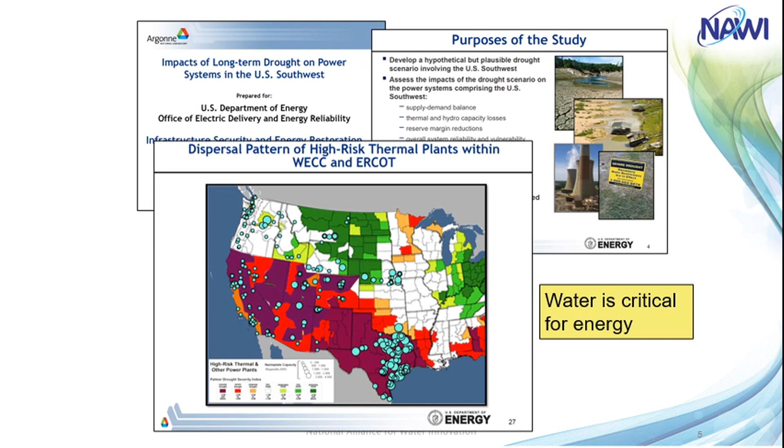But with time, the DOE began to appreciate that the water-energy nexus is much more inextricably linked. And in fact, that there are places where water and energy cross over. And in some cases, for example, in the generation of biofuels, water is an integral ingredient to producing the feedstocks that will generate biofuels of the future. Similarly, if we are going to capture carbon and store it underground, water might be the vehicle by which we pump that carbon back under the surface.

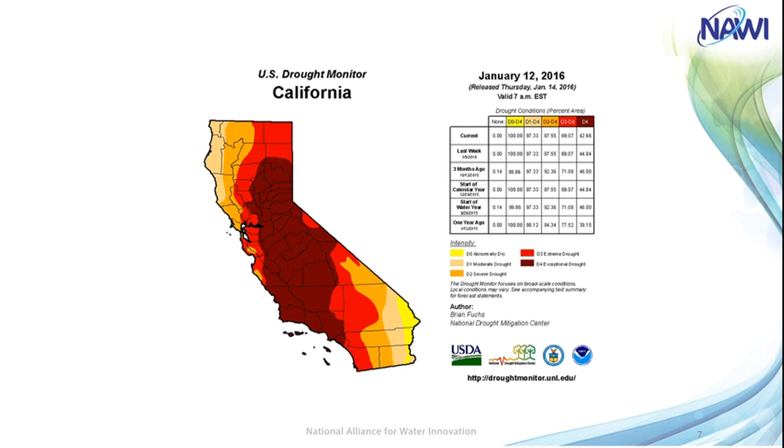Well, in California, we had our own interesting revelation, how important water and energy were. You may recall that in the last decade, California has had a series of multi-year droughts. And those droughts have prompted conservation measures. The governor at the time, Governor Jerry Brown, passed an executive order in which he insisted that state agencies and individuals undertake water conservation. And in fact, we were very successful. Citizens in California cities and towns managed to achieve a 25% reduction in water use. It was a great achievement.

Well, researchers at the University of California at Davis looked at the water savings associated with the water conservation program, that 25% water reduction that we achieved during our last drought. And they calculated how much energy was avoided because you didn't have to pump as much water, because you didn't have to treat as much water. And they found, surprisingly, that the amount of energy saved simply from that water conservation was almost equal to all the other energy conservation programs combined.

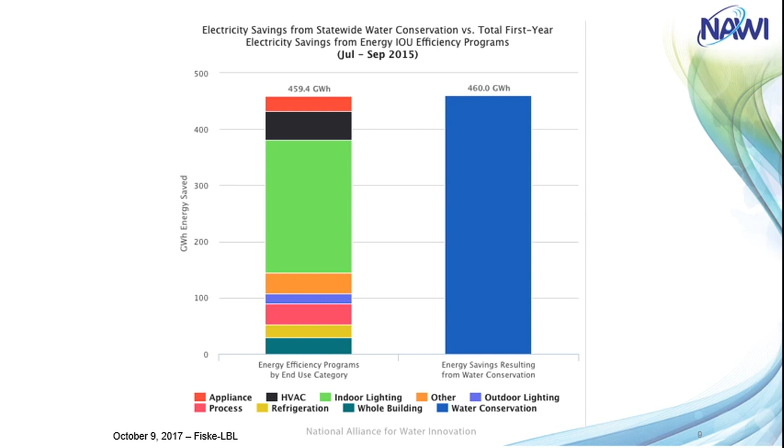And this taught us something very important. Water is energy. The two are inextricably linked, and you can't efficiently address one issue without addressing the other. So those are the reasons why the U.S. Department of Energy became so interested and motivated to study water, and in particular, desalination.

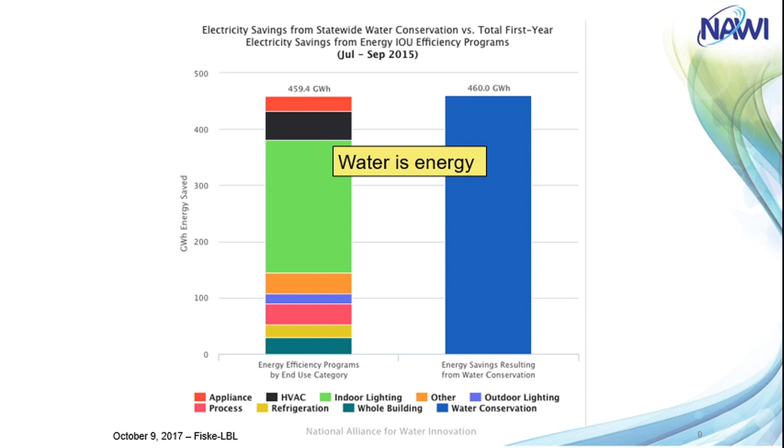So NAWI, the National Alliance for Water Innovation, is an innovation hub. This is a collection of organizations that have come together for a short period of time to conduct combined research and team science to address a key issue, desalination. The founding organizations are Lawrence Berkeley National Laboratory, where I am, Oak Ridge National Laboratory in Tennessee, and the National Renewable Energy Laboratory in Golden, Colorado. We've partnered with other agencies and organizations such as the Electric Power Research Institute and several California state agencies, including the California Department of Water Resources, the California Energy Commission, and the California State Water Resources Control Board.

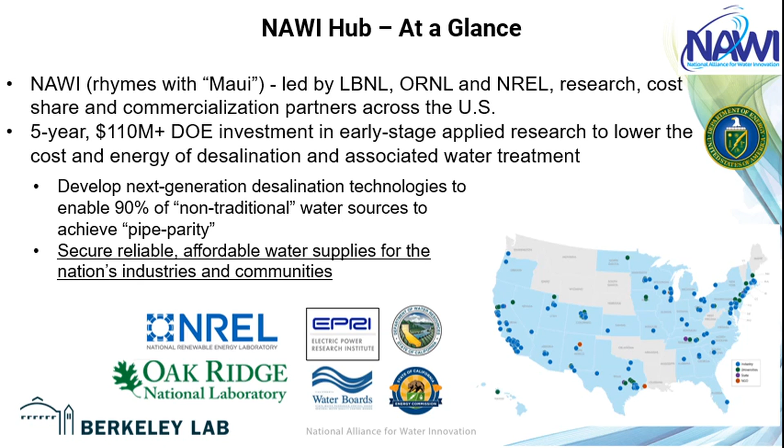Our goal is to develop the next generation of desalination technologies to enable 90% of what we call non-traditional water sources, waters that we're currently throwing away, to achieve pipe parity. That is to say, lower the cost of desalination so that the marginal cost and energy of producing fresh water or clean water from that non-traditional source is comparable to the marginal water supply presently available. Our goal is to secure reliable, affordable water supplies for the nation's industries and communities.

Now, you're probably familiar with a research consortium or a research hub. It's a group of research organizations that come together to share results and to build and do joint science. And that's part of the NAWI organizational structure. And of course, we have a wide group of US universities and industries and state agencies associated with that.

But we have around that research consortium a larger organization called the NAWI Alliance. This is an open organization. Any organization in the world can join the NAWI Alliance, and we have lists of more than 300 members so far. The NAWI Alliance can listen to and access all the research results from the NAWI Research Consortium, as well as join research teams. Universities and individual researchers are welcome. So this is one way that you can get involved in the NAWI program.

Well, before COVID, we had a range of methods by which we got together and planned our coordinated research. We had annual team meetings, and our most recent one in November 2020 was virtual, and we had industry-specific breakout meetings and even events at aligned technical conferences. And we had field trips. Many of our most successful projects are joint projects with water-producing organizations or industries, including major utilities in the United States.

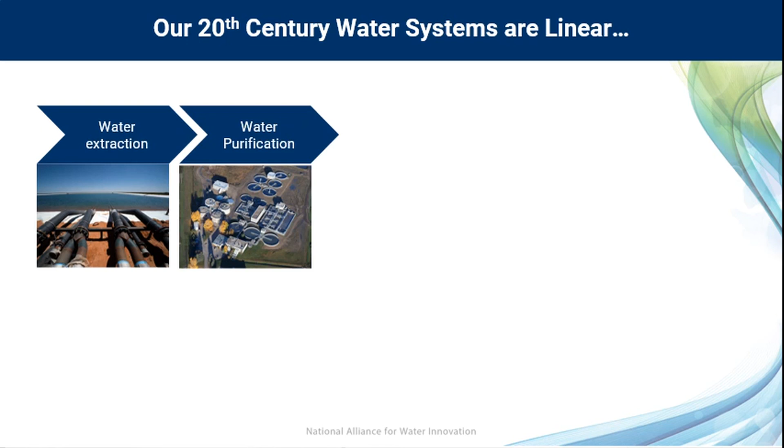At that central treatment facility, as I said, we produce a uniform, high-quality grade of water product, and then we send that finished water out into a distribution system where it's used in a wide variety of environments, including a number of environments where drinking water quality water is not really necessary. Nevertheless, this is the quality of water that we have. In the course of using all that water, we bring that water back in a second centralized network to centralized wastewater treatment systems where we treat the water to a condition in which it is safe to discharge, and we toss it back into the environment.

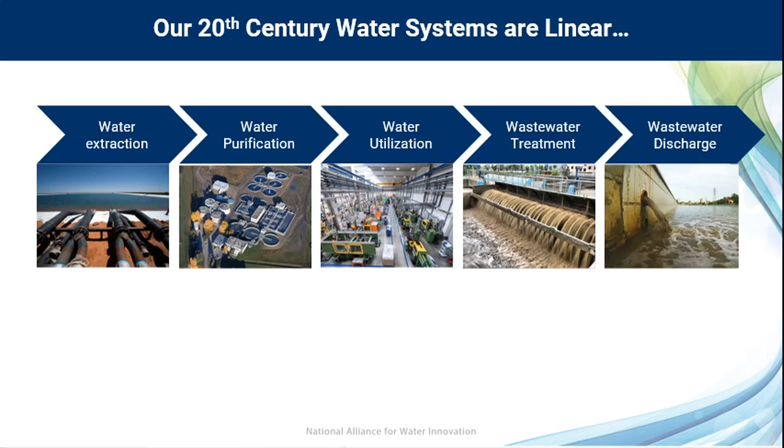Now, this linear system that we've developed is a marvel, and it has led to enormous economic growth over the last century. But it's facing some limits. For starters, climate change is imposing new limitations on the availability and predictability of our freshwater supplies. One scientist said that water is the delivery vehicle for the effects of climate change. And we certainly see this in the western United States, where we have extended periods of drought and a loss of reliable fresh water. For our communities and our cities, much of the water infrastructure below our feet is reaching the end of its life, and we are seeing an increase in cost associated with repair of our water infrastructure.

In some parts of the United States, in fact, we have small communities that are so far away from any water supply that they do not have a reliable, safe, affordable source of drinking water. And then finally, we have discharges of pollution and emerging pollutants. And these emerging pollutants are introducing risk, not just to our environment, but also an economic risk to our businesses. In fact, in many situations, our current discharges may represent future liabilities to our industries. Well, all this water is everywhere, but it's not usable.

And in fact, the first example of this vision comes back more than 60 years ago from the Kennedy administration, where John F. Kennedy proposed a bold vision to develop science and technology to enable desalination of the nation's salty waters. Now, out of that proclamation in 1962 came a small office within the U.S. Department of the Interior called the Office of Saline Water. And they began to produce research reports to understand the processes of desalination.

The fruits of that research you can see everywhere around the world today. Desalination, the most dominant technology being reverse osmosis, produces more than 10 billion gallons of clean drinking water around the world. This is an image of the Carlsbad desalination plant just north of San Diego in California, the largest desalination facility in the Western Hemisphere.

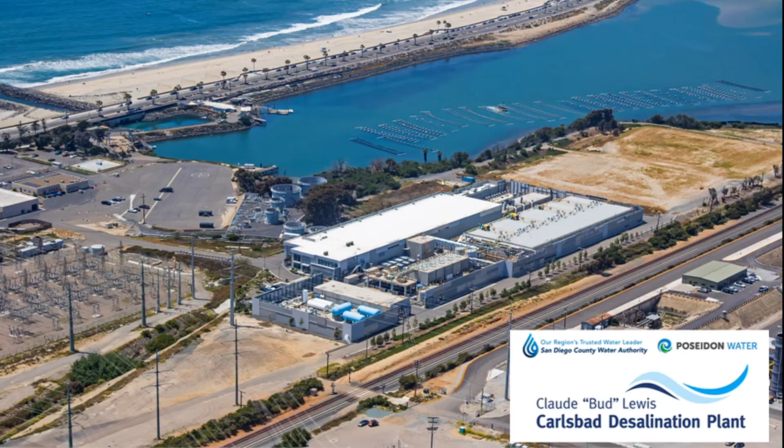But ocean water is not the only salt water that's out there. We produce a lot of salty water, for example, from our power systems. When we generate electricity, we often produce wastewater that contains salts and other minerals that needs to be treated. Our agricultural sector produces large volumes of runoff, water that's either too salty or contaminated to use again, but can't be safely discharged back into the environment.

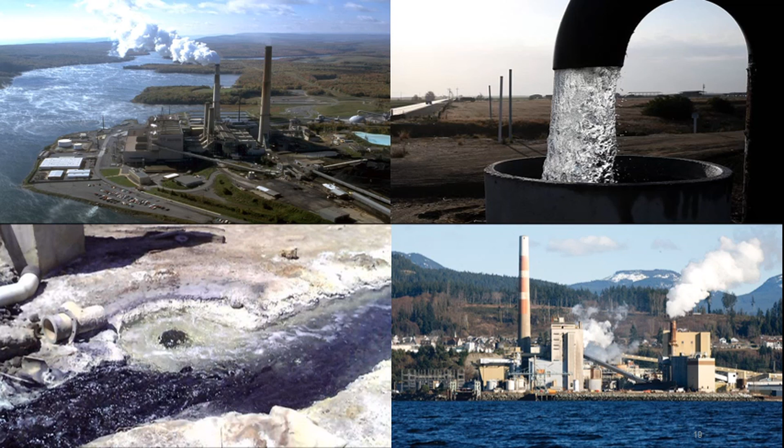Underneath a lot of the United States, there is salty, brackish groundwater. This is water that's not nearly as salty as seawater, but is still too salty to use directly. And finally, our other industries end up producing large volumes of wastewater, which they spend large sums of money to treat and dispose back to the environment.

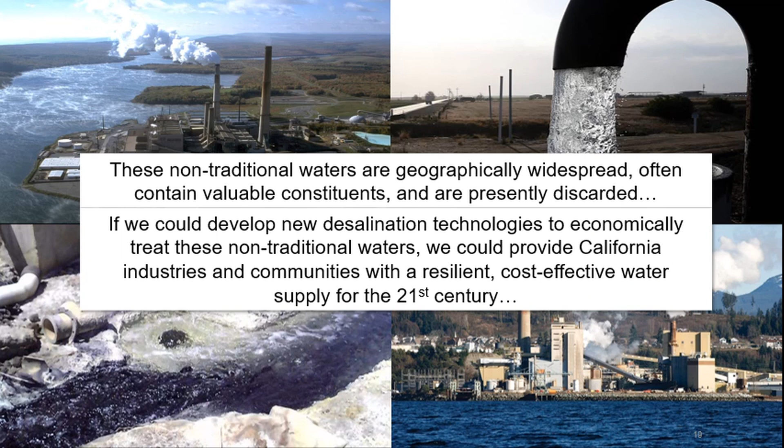Now, these non-traditional water sources are geographically widespread. They often contain valuable constituents and are presently discarded. If we could develop new desalination technologies to economically treat these non-traditional waters, we could provide California and the nation with resilient, cost-effective water supplies for the 21st century. So that's our vision. Can we expand the use of desalination?

But if we're to achieve pipe parity, that is to say, lower the cost and energy associated with desalination to the point where it's a viable marginal water supply for our communities and our industries, we can't just think about improving the desalination unit process itself. We need to rethink the entire 20th century linear system. And here's why.

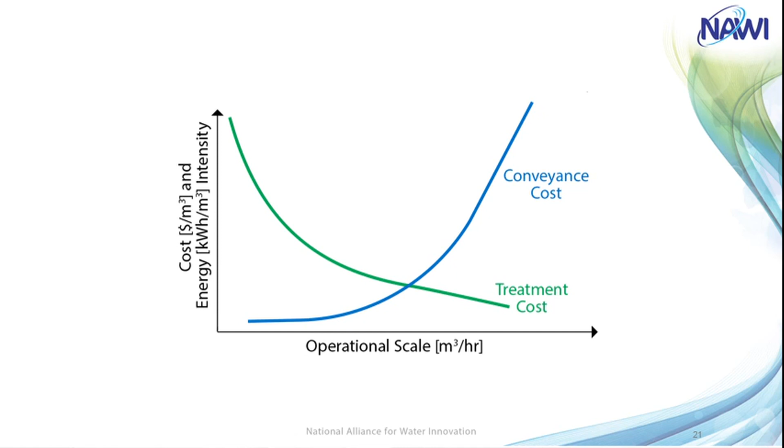If you think about water and the cost of producing drinking water today, it enjoys a very favorable economy of scale. That is to say, as we make our treatment plants bigger, the unit cost of producing fresh water goes down. But water is heavy. And when we make very large treatment plants, it also means we have to convey water from long distances into the treatment facility and then back out again into a large distribution network.

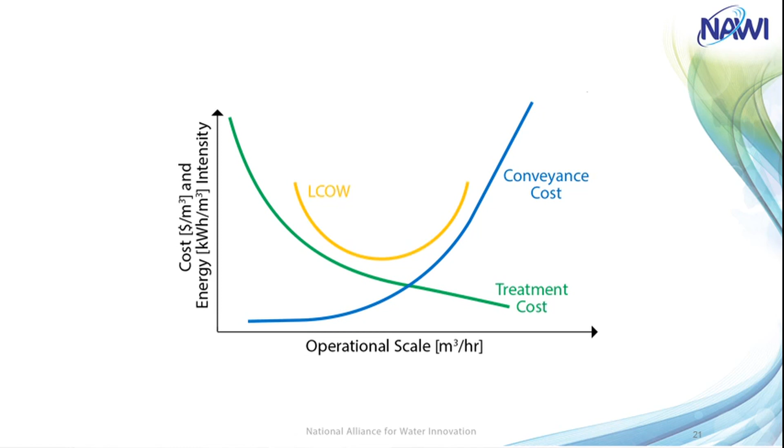And large systems end up consuming a lot more energy in conveyance, the pumping cost associated with moving all that water around. So today's technologies create a curve of the levelized cost of water that means that the most cost-efficient plants are of a certain size. Now, we could innovate and improve the unit process for desalination for very large treatment plants, and we intend to do so. But you're not going to overcome the simple fact that water is heavy, and we live on a planet with gravity, and it's going to use a lot of energy to move that water around.

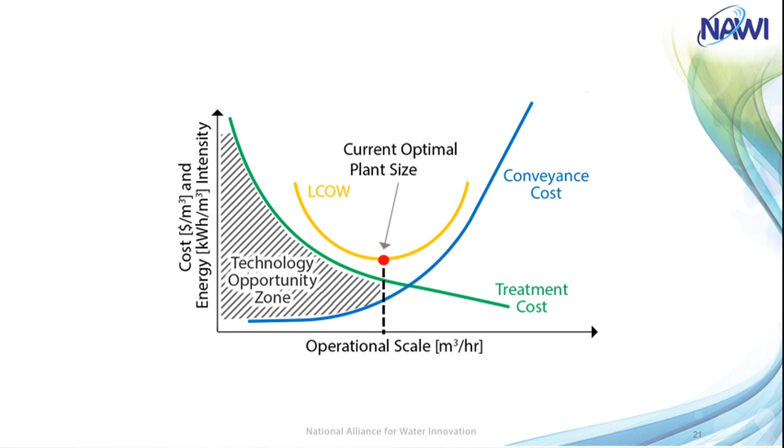So we think that the technology opportunity zone is over here on the left-hand side of the graph, where the unit costs for small desalination plants are high. And the reason is our present portfolio of technologies are mostly oriented towards large plants, and our small desalination facilities are simply smaller versions of larger systems.

If you could develop a new set of technologies that were fundamentally more efficient and lower cost, specifically at lower sizes, you'd have a much shallower treatment cost curve, which means you'd have a much shallower levelized cost of water, and you could move the cost and energy associated with desalination down further. But what this also means is that you would enable much smaller distributed desalination. Because one of the most important ways to save energy in the water business is to distribute water treatment and use water over and over again where it is, rather than moving it around long distances.

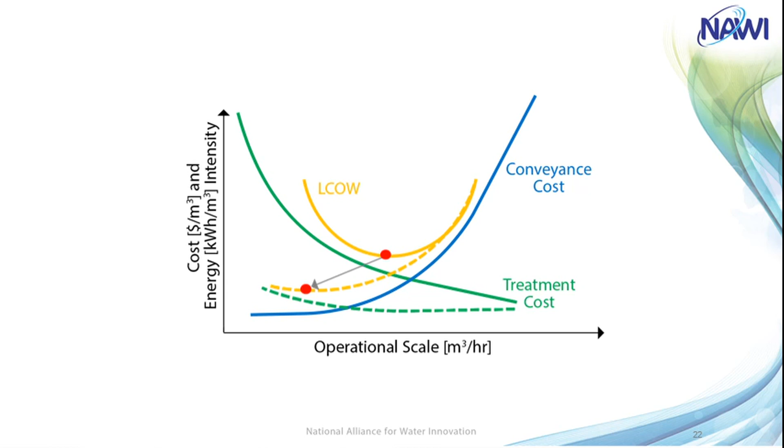Now, in developing this vision, we ended up identifying 6 challenge areas that we all thought would be valuable places to invest science and technology innovation. And of course, there's an acronym, and the acronym is spelled A-prime, and it stands for each of these 6 challenge areas. The first, A, is autonomous operation. We need to develop new sensors and adaptive processes to enable our water systems to be run much more autonomously and much more securely, without as much human intervention.

P stands for precision separations. Today's water treatment technologies are very efficient, but they sweep out all the contaminants, even benign contents. We need a new class of precision separations technologies that can precisely remove just the contaminants or just the species that need to be removed for a specific type of water use and leave all the benign stuff behind.

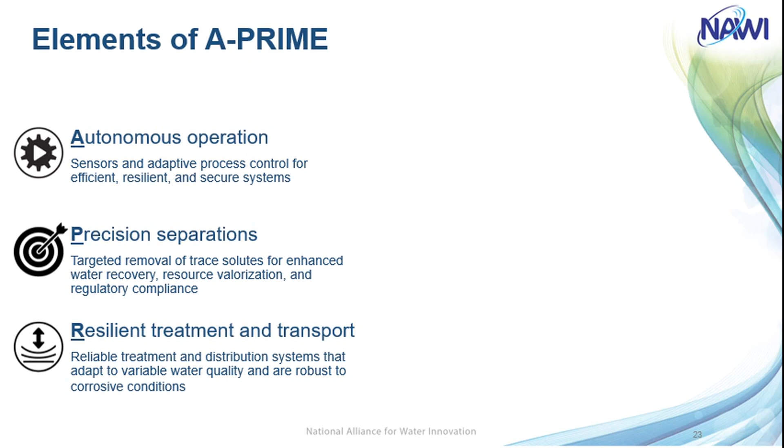R stands for resilient. If we're going to have smaller, more distributed water treatment and desalination, we need systems that can flexibly turn on and off quickly and can accept a wider range of water quality and water volume.

Intensified brine management is where I comes in. In desalination technologies, we create fresh water and also a brine waste stream. In many places, this brine waste stream is the most problematic aspect of desalination. It's great to have fresh water, but if you don't have a place to take the brine and dispose of it safely, you do not have an effective process. We need new technologies to safely concentrate brines, even down to zero liquid discharge, to enable safer storage and transportation.

M stands for modular membrane systems. Already, reverse osmosis membranes come in a very compact modular form, but even the range of modular membranes that we have is relatively limited. We would like to see a much wider range of modularized treatment systems involving membranes as well as other complementary technologies.

Finally, E stands for electrification. Presently, a lot of energy in water treatment is embedded in the chemicals we use to affect the water treatment process. If we are going to have more distributed desalination, we need to develop new treatment steps that utilize only electricity and drive much more of our treatment processes towards an all-electric future. Not only does this have benefits for distribution, but as electricity becomes cheaper with the proliferation of renewable energy, we feel this is another way to make water more affordable.

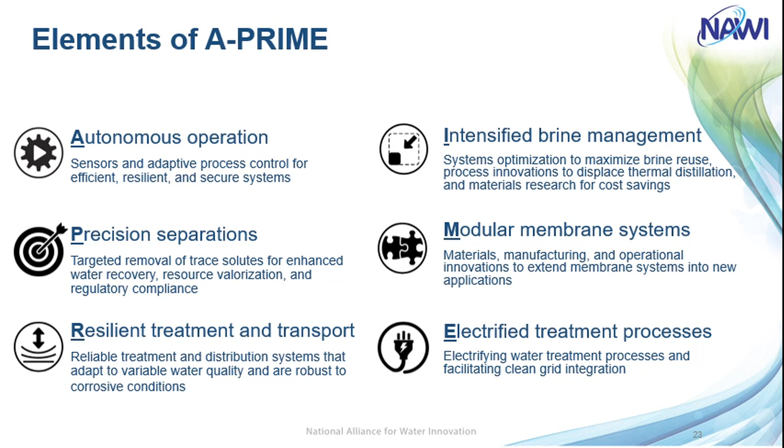As I said, each of these A-prime challenges will drive down the levelized cost of water. But when you put them all together, you enable smaller scale localized reuse. And that means you lower the water cost of conveyance, and that's how you can reach pipe parity in a wider range of environments.

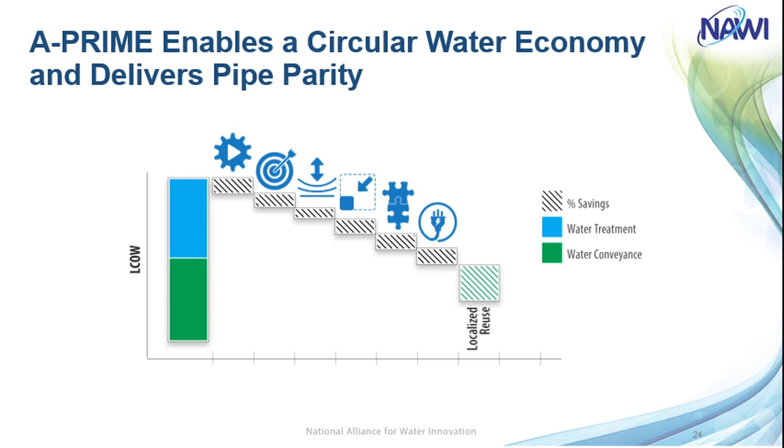Now, in some cases, the vision we have for water mirrors a transformation that's already taken place in the energy sector. It used to be that our electricity was generated with large, centralized, custom-designed power plants. They were typically designed over many years and cost billions of dollars, and you typically had only one per town or city.

Today, we still have those centralized systems, but we augment it with a distributed set of energy generation tools, including photovoltaic panels and wind turbines. Rather than being custom designed, these are manufactured products. They have a relatively short lead time, only cost thousands of dollars, and you can put them on each building. Together, the centralized and distributed systems provide safe, reliable electricity.

Just as I said before, if we can generate and reuse over and over again more of our water, it saves not only in treatment cost, but also in the energy cost of moving the water around.

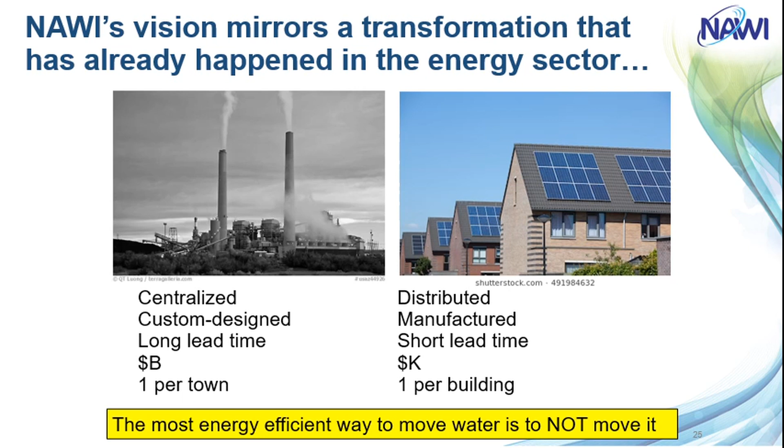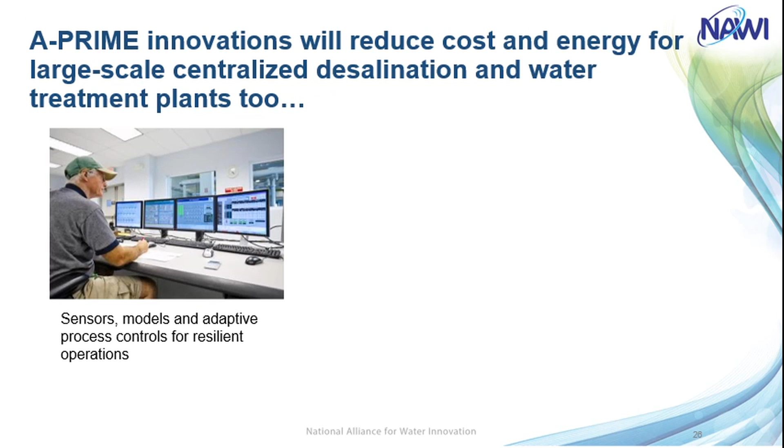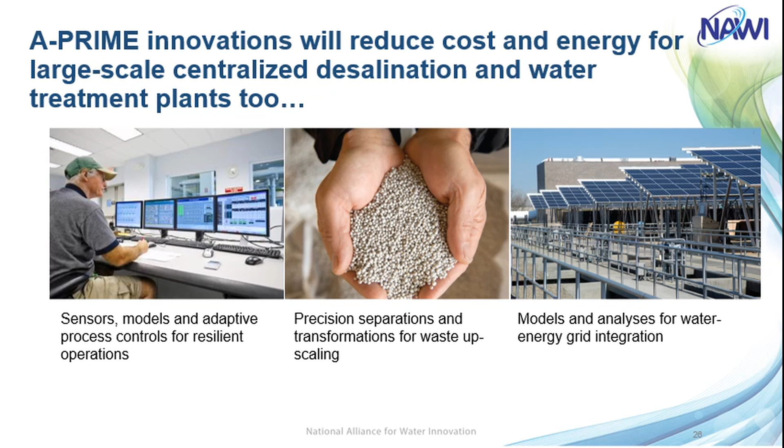Now, don't get me wrong. We think that A-prime innovations will reduce the cost and energy for large-scale, centralized desalination too. For example, the sensors, models, and adaptive process controls we develop will be immediately applicable to large, centralized facilities. And the precision separations technologies we develop will enable us to harvest waste streams and components from current desalination and wastewater treatment plants and upscale those into valuable commodities. Finally, the developments we have to push electrification in water treatment will enable our conventional water treatment plants to utilize more electricity and benefit from the revolution in renewable energy generation.

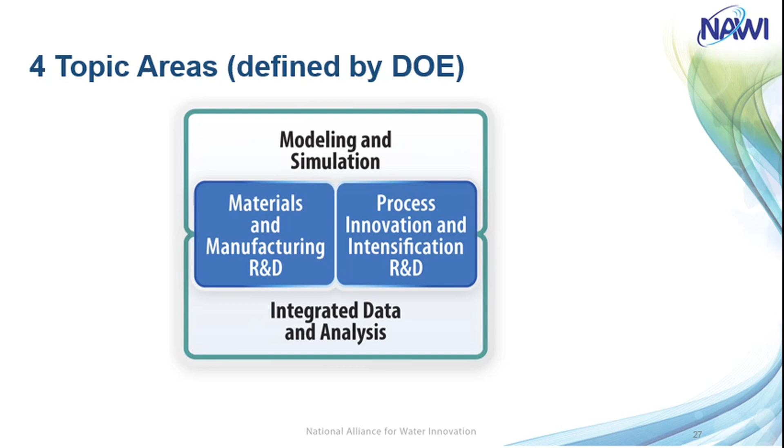From a structural standpoint, there are 4 topic areas in our program: modeling and simulation, materials and manufacturing research and development, process innovation and intensification research and development, and integrated data and analysis. These 4 separate topics work to organize our research program. So think a little bit like a matrix.

We have our 6 challenge areas, and the 6 challenge areas are how projects are evaluated. They'll contribute to one or more of these challenge areas. But from a management standpoint, the projects that we choose to fund will be managed around one of 4 of these topic areas.

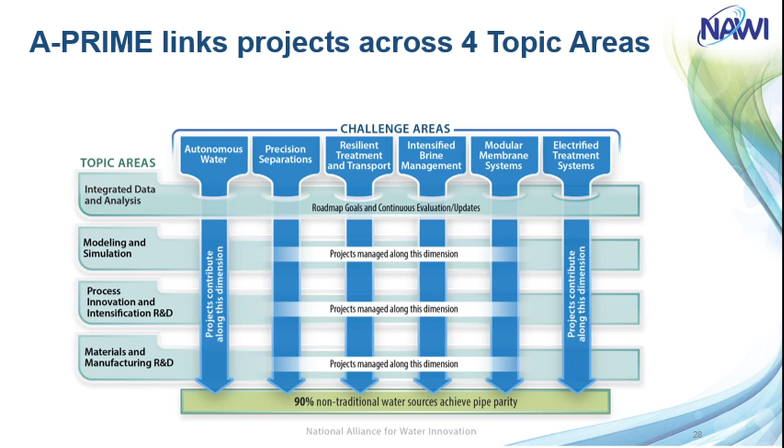And of course, NAWI is intended to be a hub in the true meaning of the word. Many of the organizations and individual researchers involved in our program are themselves also leading or involved in other organizations and research efforts around the United States and around the world. We hope not only to stimulate research in desalination that we fund, but also help researchers find new sponsors from industry and other government agencies so that we can more rapidly accelerate the pace of discovery and innovation in water treatment.

In our 5-year program, we will go through an annual cycle, starting with a road mapping process where we identify key research needs. We will then issue requests for proposals and select projects. We will execute those projects, and as those projects are executed, they will contribute new knowledge which enables us to advance the topic of desalination, lower cost and energy, and then in the cycle we will evaluate what's left to do.

In our first year, we already issued our first funding opportunity announcement on the subject of intensified brine management. There was $8 million of funding, and we are presently near the end of our selection process for these projects.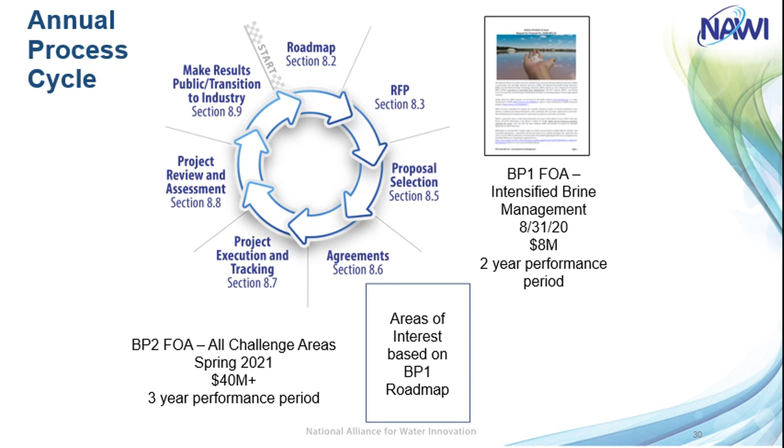This next year, we intend to release a much larger amount of money across all of our challenge areas. We'll be doing this in a series of open calls for proposals in the spring of 2021. We estimate that upwards of $40 million of research investment will be issued. These grants will be for 3-year performance periods.

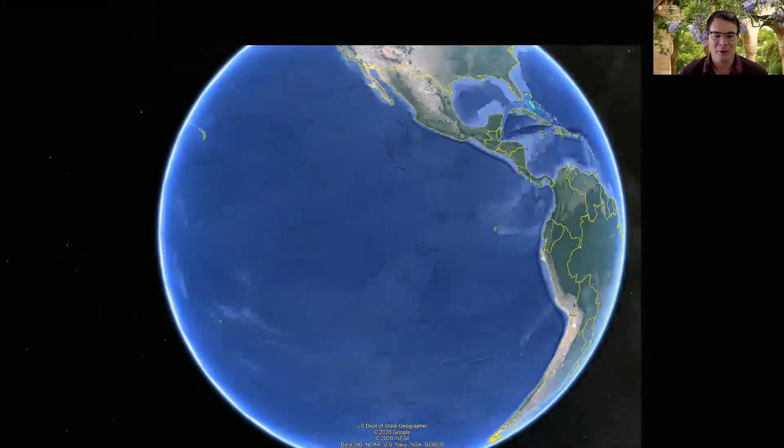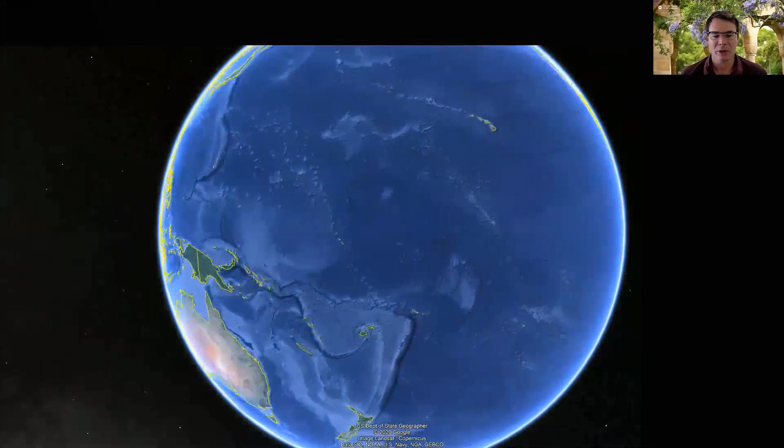Now, the Pacific stretches from the Americas across to Southeast Asia and Australia, and it's an enormous expanse of an oceanic region of the world with isolated islands inhabited by rich populations of people in terms of their culture, their livelihoods and their intact environment.

And these nations are highlighted, I guess, or typified by the Solomon Islands in the Western Pacific, northeast of Australia, adjacent to Papua New Guinea, where I've spent the last 15 to 20 years working on water-related challenges.

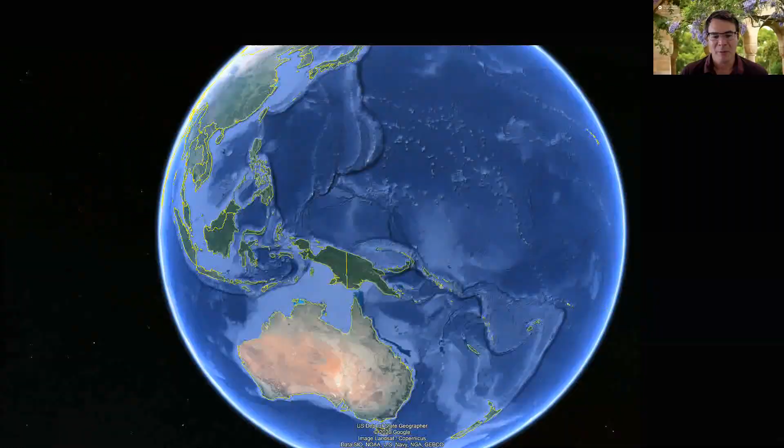Now, when we think of the Pacific, people often have these romantic images of rich cultures living in seaside villages with a long and proud history of environmental stewardship. Typically these coastal communities on the coastal fringe, certainly in the case of the Solomons, have large volcanic islands densely forested in tropical rainforest, with catchments capturing up to 3 to 4 meters of rainfall a year. So typically an abundant environment in which to live in terms of water, food, housing, clean air and good health.

We have classic high volumes of fresh, high quality water that these catchments are providing to the local communities.

In other cases, we've got low-lying islands, sandy atolls that are only a matter of 1 meter to 2 meters above sea level. In these situations, populations tend to be very dense with limited agricultural land and typically reliant on groundwater and rainwater resources. In fact, some of these populations in Micronesia and the Pacific are some of the most densely populated places on Earth, even more so than Manhattan, believe it or not.

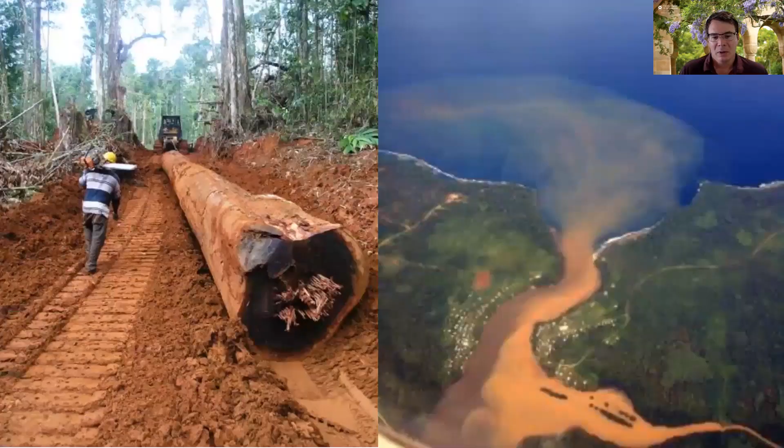These are high value species that are really harvested in what could only be described as a bit of a smash and grab operation, with little consideration given for not only the regrowth of the vegetation, but also the sediment management that's obviously so critical for water quality in these volcanic soil environments.

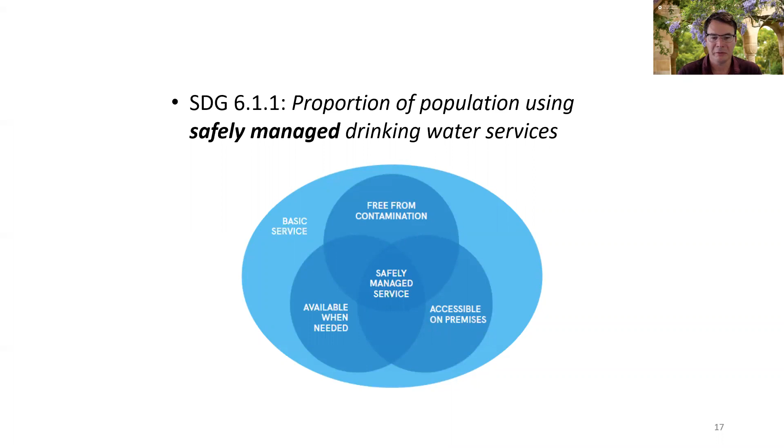And if we think globally about the SDGs, 6.1.1 in particular, which is looking at the proportion of the population that has access to safely managed drinking water services that's accessible, available, and clean. And globally, we know that some regions of the world with particular water scarcity in Africa are struggling to meet these SDGs.

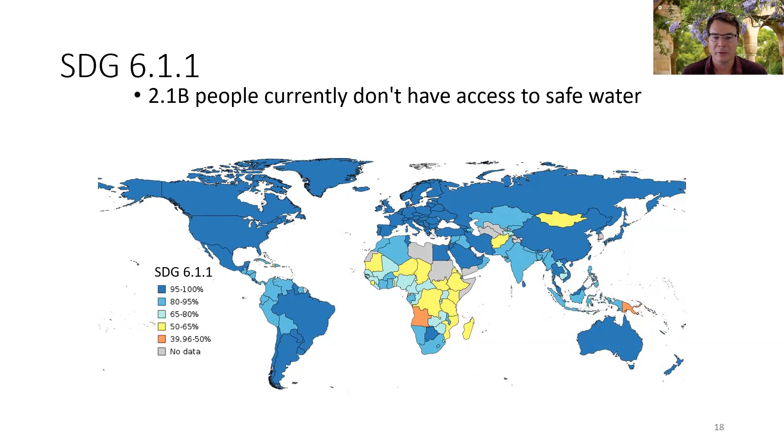And interestingly enough, also, if we look to the Pacific, Papua New Guinea and the Solomons and many other nations in the Pacific are also amongst the most poorly performing globally, despite their 4 meters of rainfall and relatively abundant water resources.

However, as mentioned, the Solomon Islands is really going against that trend, where we're seeing decreasing access across the nation to improved water sources, and we're seeing increased reliance on unimproved surface water, natural waters.

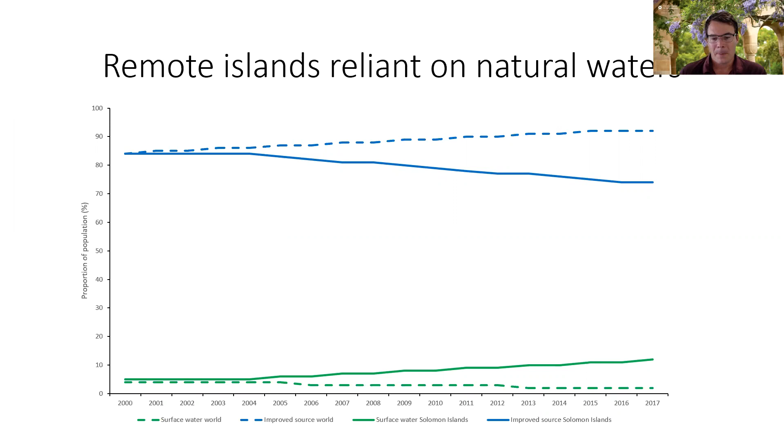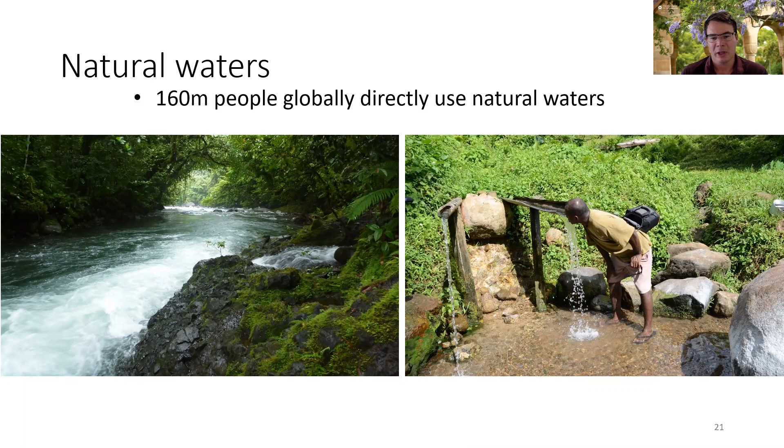Unfortunately, however, these surface water sources are highly vulnerable to impact from extractive industries. And so we can transition from an ecosystem service and a natural forested system, in this case a limestone karst environment that's providing a critical ecosystem service in terms of filtering and providing steady, reliable, clean water services to the local population. That can quickly transition with even relatively small amounts of extractive industries such as logging to high amounts of sediment runoff being mobilized from volcanic soils during intense rainfall events. And in this case, that sediment plume washing out of that coastal river into the marine environment.

So we've been tracking that transition in the Solomons national capital, Honiara, which has for a long time relied on a natural underground spring to provide over half of the national capital's water resource that's then piped and pumped across the city of Honiara. This remote sensing analysis over the past 4 years, 2016 until 2020, indicates the disturbance of logging operations within those catchments.

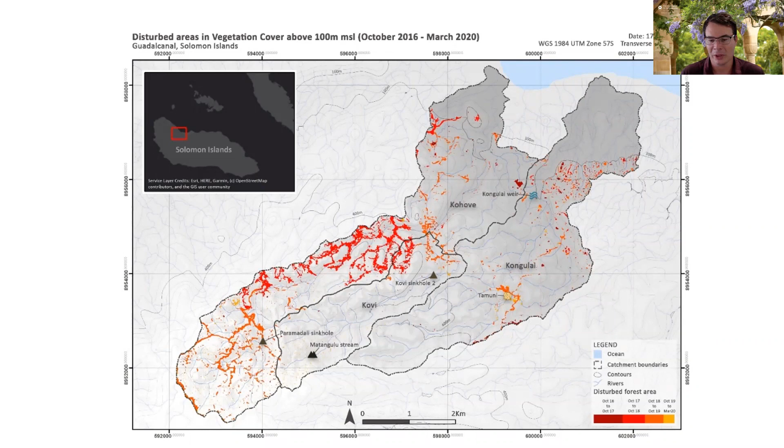So despite the Water Authority's best efforts to conserve the logical topographic catchment, in fact, the impacts were occurring underground through these karst environments. And so this really highlights the vulnerability of these water sources to catchment disturbance. And we saw here over the space of 4 years that despite only approximately 10% of the catchment being disturbed, that caused significant impacts on the water quality feeding the town of Honiara.

You can see examples from 2016 in panel A across to 2019 in panel B there at the top, the rapid escalation of sediment disturbance through these logging operations, and down below the consequent impacts in terms of mobilisation through the stream network into the coastal areas.

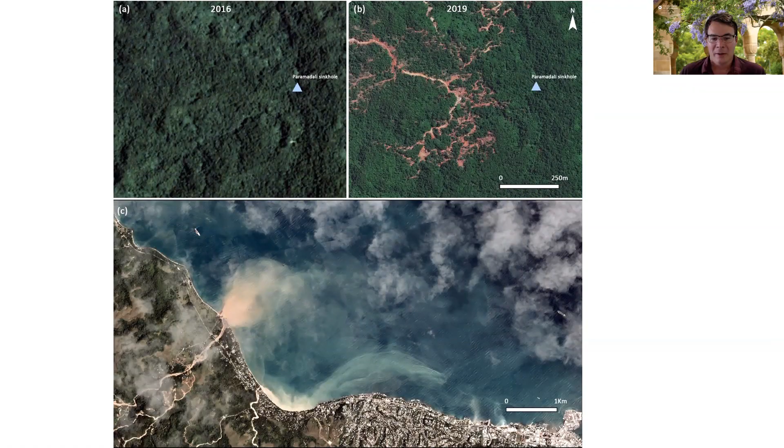And this is the end result. This is Honiara's national water source. There isn't any filtering service there. It just goes through basic primary chlorination, which is only effective to a point. Once turbidity exceeds between 5 and 20 NTUs, the chlorination's ability to safely deliver water is significantly reduced, and the nation's capital water supply is often turned off with very little notice.

And so clearly having a capital city so vulnerable to these water outages driven by logging is particularly challenging in light of COVID-19 and the increased need for hygiene and cleanliness. And that's particularly challenging when the water is turned off without notice for up to a week.

So if we look at some of the data, I did promise you no data, but I had to put some in. So we've worked with the National Water Authority there in the Solomons to install some monitoring equipment in a very remote location that can start to provide this relationship between timeframes of rainfall and the subsequent turbidity peaks into the system. So we can see here a fairly moderate, 20 to 30 millimetres every half an hour rainfall event on the 5th of March this year. And we can see within 6 to 12 hours, we have a significant turbidity spike there, which lasts for up to 2 to 3 days before it gradually reduces again.

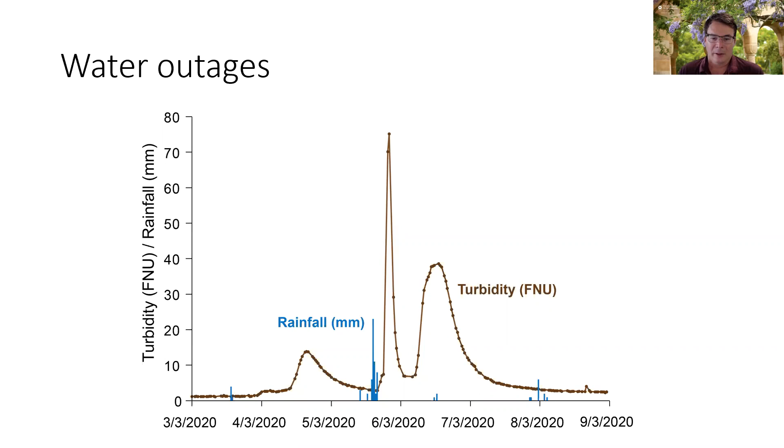And unfortunately, if we look at the arsenic concentrations in the surface waters downstream of this mine in the Solomon Islands, we can see that they're exceeding the World Health Organization standards often up to 5 to 10-fold above the WHO standard for primary contact.

So these are significant challenges in the case of mining operations because the timescales tend to be decadal rather than these event-driven turbidity spikes that we saw in the drinking water. Once these mining operations have disturbed the sediment and exposed the rock, it can be a matter of decades before natural rehabilitation can occur.

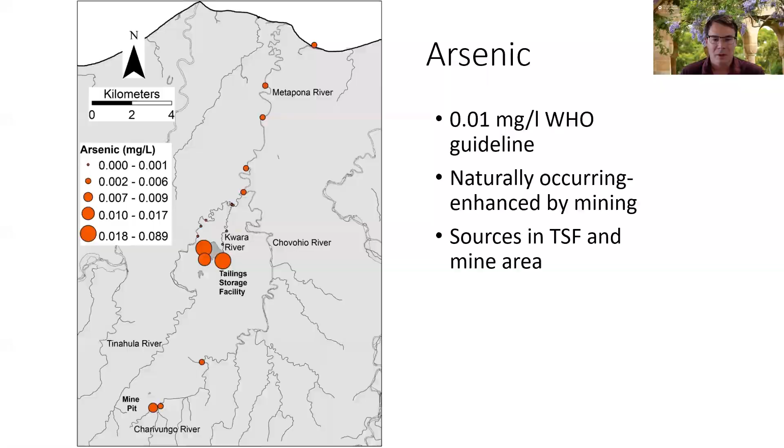So ultimately, we need to be thinking about solutions to these challenges. Obviously, in the case of the water catchment for Honiara, the logging operations over that 4-year period delivered revenue to the local people and the national government to the tune of $1 million over 4 years. So a relatively small amount of money that has now led to the water in Honiara being switched off for 20 to 30% of the time over a year.

So these are significant disruptions to the local community, and that's now led to the need to build a treatment facility to try and manage that water quality. In this case, that treatment facility is going to cost on the scale of $20 million, which is effectively replacing $1 million of revenue that the logging delivered.

So obviously there's a huge amount of scope here for trying, before this damage is done, to capture these ecosystem services in some sort of monetized way, either through carbon credit schemes or traditional payment for ecosystem services schemes that can help facilitate the local communities to protect and conserve this land for the water filtering potential that it's providing.

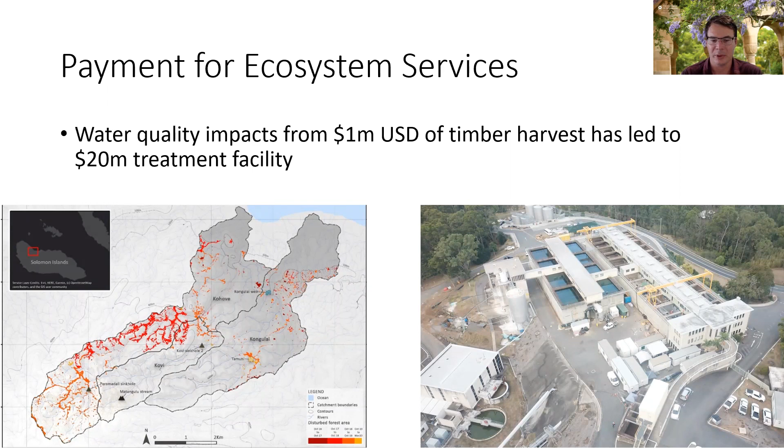Other ways forward that we've been working on is, in these remote situations, delivering modern cloud-based water quality monitoring infrastructure that can rely on fairly low footprint equipment using satellite communications and solar power that can provide real-time access to data, both for the water utility providers, but also for the local community.

So with these data interfaces, within seconds of this information being collected, alerts can be pushed to water infrastructure providers, and alerts can be pushed to the public that there's a likelihood of a water interruption within the next 6 to 8 hours, and they should prepare themselves. And that relatively small investment can provide a rapid transition to preparedness and increase the reliability of the water.

Other opportunities in these remote situations where traditional water quality monitoring infrastructure may not be possible. With tailings dams in mining situations, for example, it's near impossible to get access with boats or personnel. So we've been developing autonomous systems, using aerial drones that are able to fly into remote water bodies, winch down sensors or land on the water to conduct water profiles, and then again transmit that data back to infrastructure providers to provide them with some real-time intelligence and understanding of these systems.